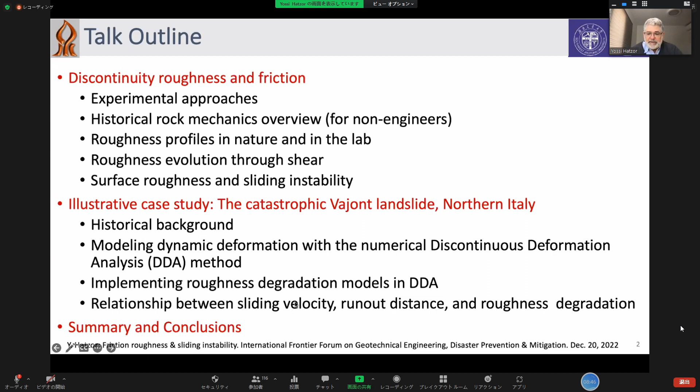So let's begin. For some of you, this will be a review of well-known concepts. I just want to draw a line and make a common denominator between all of us. So to determine friction in the lab, there are several methods we can use.

One is the simple direct shear device. Simple, I mean simple, not simple shear, but direct shear, simple device. And this is,

It has a lot of advantages, because when we use direct shear, we can model correctly the deformation across the roughness. Because if we apply constant normal stress, for example, then while the upper box is shearing, it can also dilate up and down. And that dilation plays a very important role in the shear process. So direct shear, the advantage is that we can model dilation.

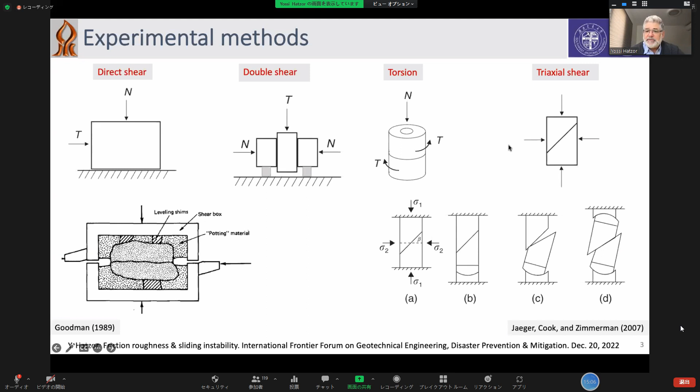So what we're using in this research is our direct shear system. It was manufactured by a company called TerraTek. They no longer exist. They were bought by Schlumberger. And so now it's embedded within Schlumberger.

This is Bob Griffin, the mechanical engineer from TerraTek, who even after they have been purchased by Schlumberger, he still continues to come to Ben Gurion University and provide service. And so these are some graduate students that you will see their results in a minute.

And so we have a normal piston of up to 100 tons force and a shear piston of 30 tons force. And everything is in servo control, both the normal and the shear, both in load and displacement control.

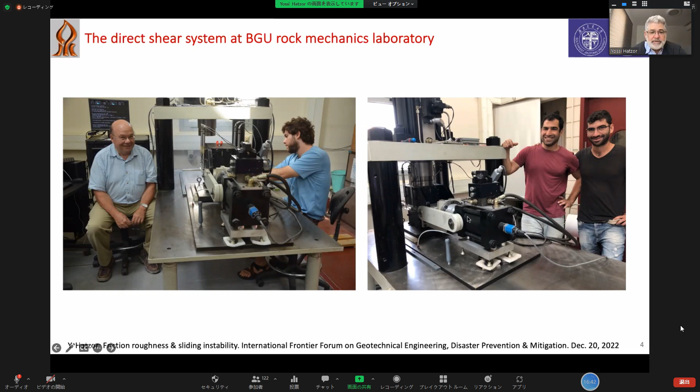So we can impose a normal stress, constant normal stress, and monitor the dilation by the output of these 4 LVDTs very accurately, while pushing from the shear piston. And then we can control the shear piston also by load or displacement. We can shear under a constant displacement rate or under a constant load rate, depending on the application.

So in the triaxial system, we started out with this system also by TerraTek a long time ago, when I came to BGU. I did my PhD at Berkeley with Professor Goodman, and then I came to BGU in the early 90s and received a grant to buy this system. So this is my old triaxial system. And now recently we received another grant and purchased this new triaxial system.

We call it from Vinci Technologies. It's a subsidiary of Vinci Technologies called Flux Lab, in France, in Paris. And the nice thing is that it's completely different technology.

These are working on syringe pumps here. We have 3 pumps for the axial piston, for the radial pressure, and for the pore pressure, and they're very, very accurate. The drawback is that the syringe pumps, because of the small volume, cannot really follow the post-peak deformation very well as in this triaxial system. Even if the system is stiff, as you see, it's very stiff.

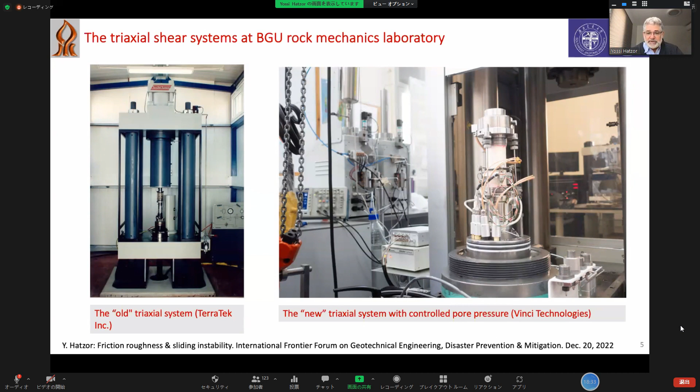It's got wide columns. Still, if you want to monitor or study post-peak deformation, I find this system much more reliable. That works on a hydraulic power supply that applies the piston. Here with these syringe pumps, it's very good for controlling the pore pressure and the confining pressure, very, very accurate. However, to follow the axial stress all the way to post-peak, I find it very challenging in this system. So we are working on this to improve it.

So how do we bring the discontinuity to the lab?

This is a method proposed by Goodman. You can drill across it, or if you intercept the joint in the borehole, that's fine, and you can then cast it and bring it to the lab, or we can just bring the blocks like you see here. This block, this interface here, see. We put it in the shear boxes, the upper and lower shear boxes. So we basically reconstruct the situation in the field.

Now, if you notice this... I just want to see if there's no chat, no questions. Oh, okay. Sorry, let me just make room for the chat on the other screen. Here it is. Okay. All right.

Chat. Okay. Ah, good. Yeah, Professor Hatzor, you will answer the question at the end of your lecture. Okay, they can input the questions anytime, but you don't need to answer them. Okay, thank you. Thank you for the clarification, Professor Chen.

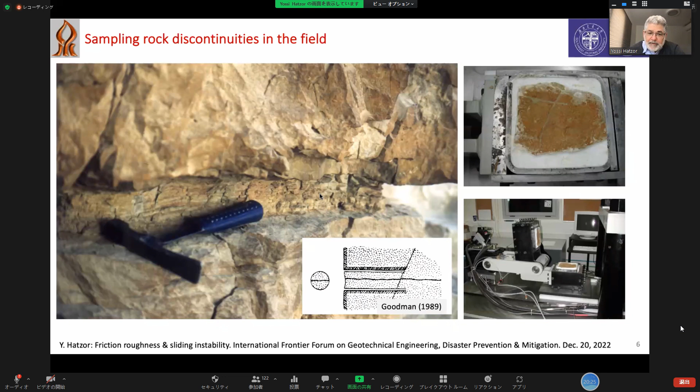So, you see that when you go to the field, the discontinuity is not smooth. It's very rough, and also it has some filling material. And all these things need to be considered when testing the friction.

So just to show you one example, this is the same material that you saw in the slide before. This is in the triaxial shear, and this is in the direct shear. And it's very interesting that the triaxial shear gives us this failure envelope, whereas the direct shear gives us this failure envelope, with peak friction here at 41 degrees and residual friction here at 23 degrees.

This is just for the geologists, when they are not used to friction angle. So what happened? How come the friction coefficient is so high here with respect to this? Well, this is simply because when we shear the rough interface, we mobilize the roughness, and the mobilization of the roughness provides much more shear resistance. Whereas when we shear this saw-cut surface, even if it's filled with crushed dolomites from the previous slide, still we're not mobilizing any roughness apart from the roughness of the saw-cut.

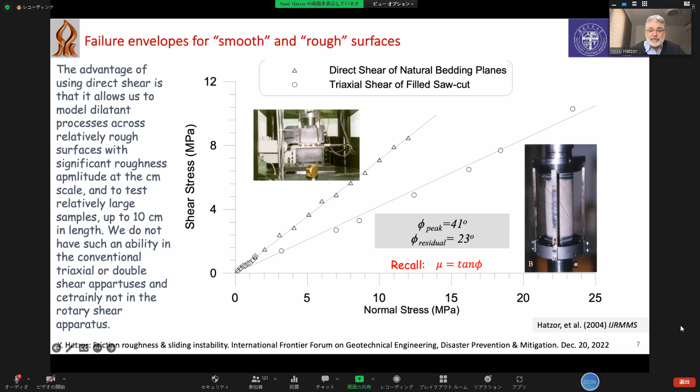And this is why we end up with a much shallower failure envelope and almost half of the friction. So it's very important to realize how important it is to consider roughness. So just a brief review of the literature. Some of you will find that not necessary, but I don't know the audience, who's sitting here. So I just want to give a broad but brief introduction of the principle.

So it's interesting to note that even if you know this material, the direction that I'm taking this is maybe different. Excuse me, I don't have COVID, but a little bit of a cold.

So if you consider this, consider Byerlee's law. All the geophysicists and seismologists talk about Byerlee's law. He compiled results from many labs, also from his own lab. Some of it pre-existing discontinuity, some of it solid cylinder, and plotted and got a line. He went to geophysical stresses up to 20 kilobars, right? This is 20 times 10 to the 3. So these are kilobars, 20 kilobars.

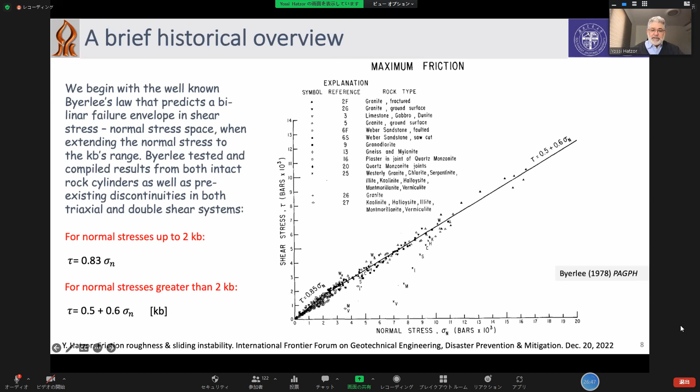That could be the motivation for our work, because people may say dilation is only important for very low normal stresses. But if that is so, why did Byerlee find this bilinear law? So there has to be a contribution from dilation even at lower normal stresses, up to about 2 kilobars. So it's actually quite significant for geological purposes too. This is what I'm proposing.

So how do we measure dilation and roughness? Niek Rengers, in his PhD thesis, came up with a very novel method. First, he used a dial indicator and plotted it on tracing paper, as you do with a profilometer, but he also did it with circular plates to which he attached a Brunton compass.

He showed - these are the poles, for those familiar with stereographic projection - the poles of the small plate, and these are the poles of the large plate. You see that the poles of the small plate cover much more area than the large plate, meaning that the small plate can capture the roughness better than the large plate. So we understand from this that the roughness is scale dependent.

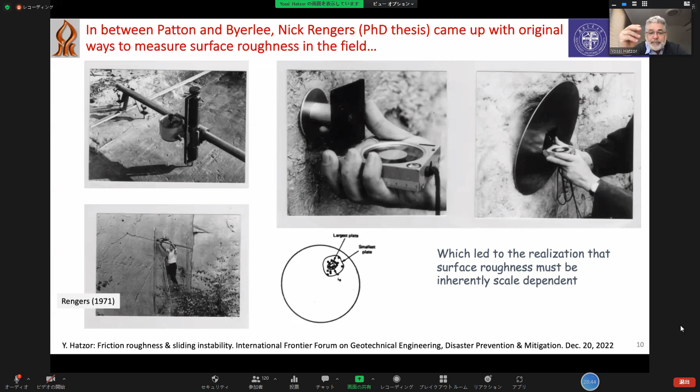It depends on scale, on the scale of the measurement device - if it's a line, the wavelength of the measurement, and if it's a sphere or a plate, the radius of the plate. This is very easy to understand, because the smaller the radius of the plate, the more you can measure the details of the roughness. So the roughness now becomes a scale-dependent parameter, not just i as Patton proposed, but i per scale, for some scale.

Another thing Rengers showed very nicely is that if you have an initial roughness and you shear, the amount of dilation you can expect goes down with the distance of shearing. If we only shear 1L, we get this delta H1. If we shear 2L, we get this dilation delta H2. If for every L we plot all the values - 1L, 2L, 3L - and take the extreme values at each base distance, we get a roughness envelope that goes down, meaning the actual roughness angle is reduced with displacement for a given roughness profile.

Then, as Goodman suggested, you can put it into the shear criterion: phi residual plus i, the relevant dilation for the amount of displacement we're talking about. So for each amount of displacement, there's a different dilation angle. It's very important to realize two things: that dilation is scale dependent, the roughness is scale dependent, and that the dilation changes with displacement.

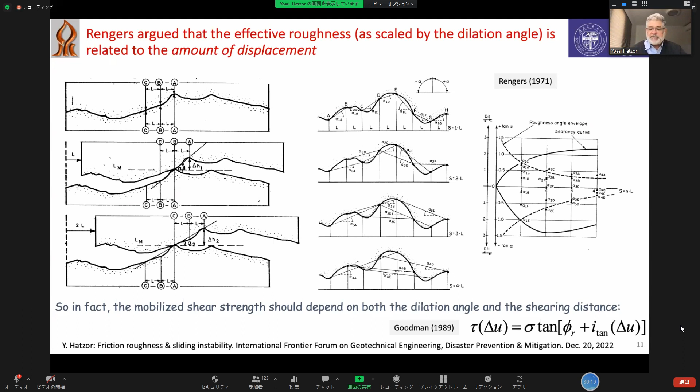Another contribution we will use in the case study was by Bandis, who later collaborated with Barton. In his PhD thesis, he showed that the peak shear resistance changes with block size. If the block is small, 60 millimeters in this model across the same joint roughness, we're mobilizing the maximum amount of shear. With increasing block size, we mobilize less and less shear. This goes back to what Rangers showed us: if the block is small, it rides over all the asperities and mobilizes all the roughness, which is why we get much higher frictional resistance than when the block is large.

Something interesting to point out: the peak friction is mobilized when you shear approximately a distance of 1% of the block length of the overriding block, more or less. So 0.6 millimeters for a block of 60 millimeters, and 3.6 millimeters for a block of 360 millimeters. It's just a rule of thumb. He and Barton never said this explicitly, but it's something that comes out from this set of tests - that when you shear about 1% of the overriding block length, you're mobilizing most of the friction.

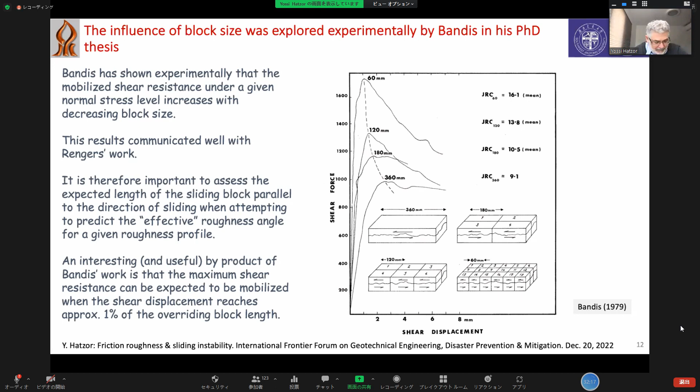Finally, Barton proposed, using the same result, that the shear strength is comprised of the residual friction angle, a geometrical component, and an asperity failure component, and that's what led to Barton's JRC. We understand that there's a basic friction angle for joints, which is the pure friction angle - what it is, we need to determine. The geometrical components and the strength failure component change with size, so the smallest blocks give us the highest geometrical and shear strength components.

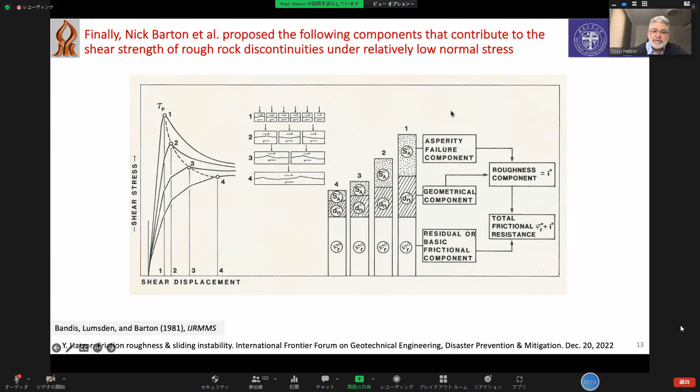Okay, so we know all that, and now we go to the real world. People have been studying this for a long time, starting from the 80s when Mandelbrot proposed his fractal theory. People wanted to see if it works also for faults, and they started plotting the wavelength and the roughness in terms of power spectral density, with units of meter cubed, but you can also think of it in terms of RMS deviation from the mean, and it looks the same. If we plot those on a log-log plot, we get a linear trend, meaning the roughness increases with the wavelength - the larger the wavelength, the higher the roughness.

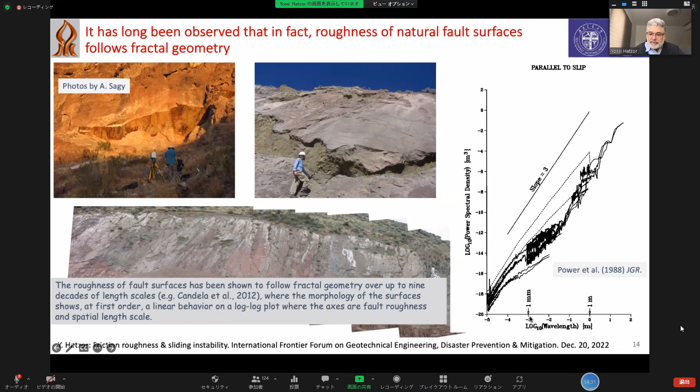So as we already saw in the historical overview, you can't talk about a constant value of roughness. You must consider the scale of the measurement, and it goes like this. This has been shown for nine decades of wavelength - it continues to plot on a straight line.

So how can we create rough faults in the lab? What we do is take a prism - this is a limestone prism. We move aside the direct shear system and use just the normal piston. The direct shear system is here on the side; we move it aside, we have air bearings here, we open up the air pressure and shift it to the side. Then we tell the piston to go down at a constant rate - not constant force, but constant velocity rate.

We create a configuration of four-point beams - one, two, three, four. The compression arch is like this, and here it is tension. So now I take my T, and exactly when I take my T, it breaks - always breaks when I take my T. So we get this fracture, which is basically a tensile fracture that we created in the lab, and the roughness is very significant.

This is a diabase or gabbro taken from a quarry in China - we found it in Israel, but it was originally from China. You can see this roughness was created by this method. Then we can go and saw cut the surface to get the roughness of the saw cut, and then we can go and polish the surface.

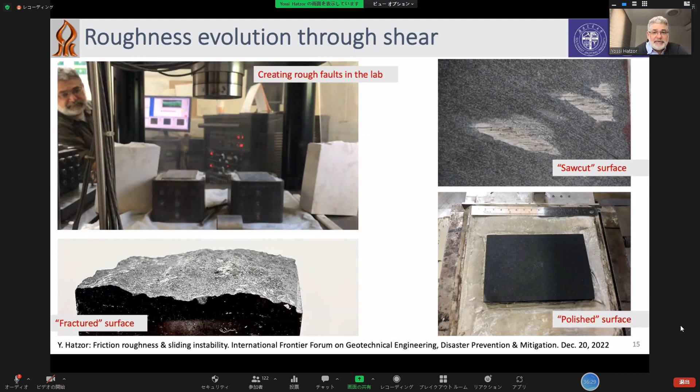So we get the polished roughness, and then we need to scan the roughness. There are different ways we can do it. This machine, this profilometer, we used for most of our tests and measurements. It was good to go all the way down from fractured to saw cut surfaces.

For the polished surfaces, we went to another university, the Hebrew University, to use a white light interferometer, because it can avoid the reflections. It can deal with the reflections that come back from a very, very smooth interface.

And finally, in our lab, we have another young faculty member, Yuval Tal, and he has this scanner that is very, very accurate. Here you see we use it now to study the roughness of inclined joints for induced seismicity studies, how roughness influences induced seismicity, and you see the device and how it works. So we have all these tools to measure the roughness, so we can do that.

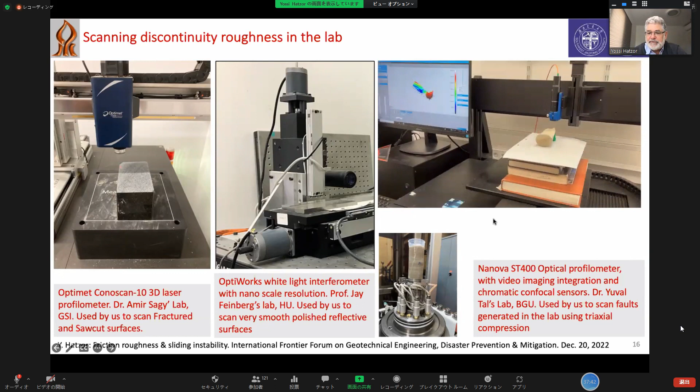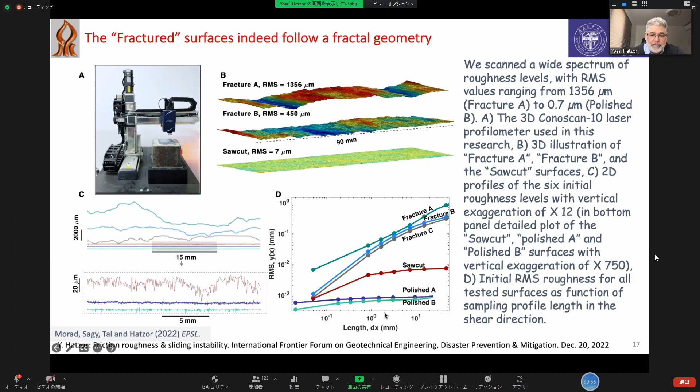So we can go from, these are 0.7 or so microns, to this which is 1,300 microns. So very, very large. Of course, when you say what is the RMS, you have to specify this RMS is for some kind of length. We did it for the 4 centimeter range. So RMS again is a function of the length, and in this case we report it for 4 centimeters. So now, how does the result look like?

Look at how the results look for the friction. This is the same rock, the same diabase from China. You see for the very rough interface, fracture A, we get a friction coefficient of more than 2. And then it breaks and it slides, and here there's some stick slips. This is fracture B and C, and this is the saw cut. They all converge more or less to the same residual friction of 0.6, as we're used to. But when we go to the polished surfaces, the friction coefficient goes much lower, even around 0.1 or 0.2, very, very low.

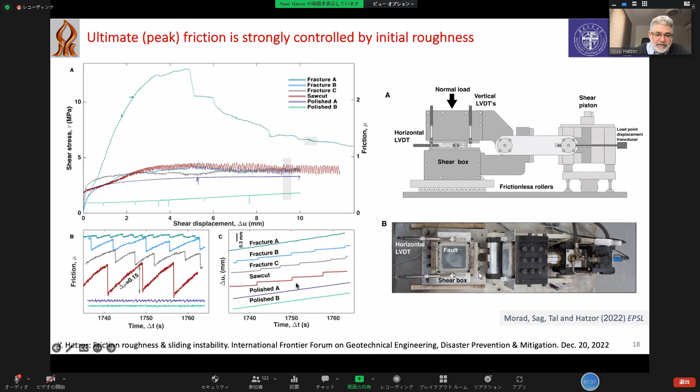One of the interesting things in this research is to show that the stick slip oscillations that indicate unstable sliding are very much a function of roughness. If we take these areas, stick slips from here and from here, you see that the amplitude of the stick slip peaks at the saw cut surfaces, and then it goes down toward both extremes. Somehow the saw cut surface is more prone to stick slip deformation than the other surfaces, and you can see the stick slip here in time space. This is the displacement; you see that the saw cut is much more pronounced, and we'll get back to that later.

So what happens to the roughness with shear? As we would expect from earlier studies, the roughness would degrade with shear. Here we start with 7 millimeter slip and increase to 12, 10, and 15. You see that the roughness spectra are reduced in all cases, and reduced more with increasing displacement. It's interesting that it's reduced on all scales, on all lengths, simply the surface becomes smoother. So this we can show very clearly.

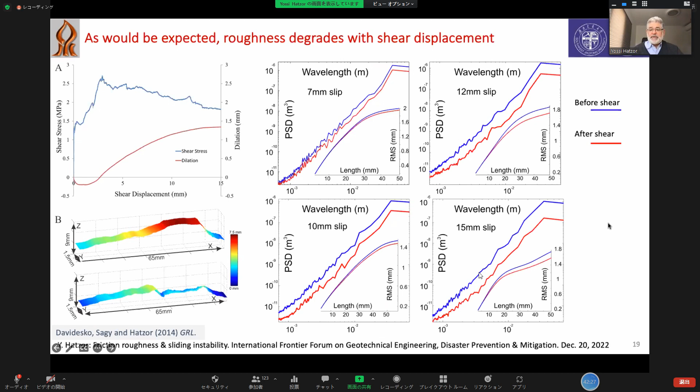About normal stress, it's not so simple. With normal stress, we're getting a trend where below 5 MPa, we're getting the smoothing.

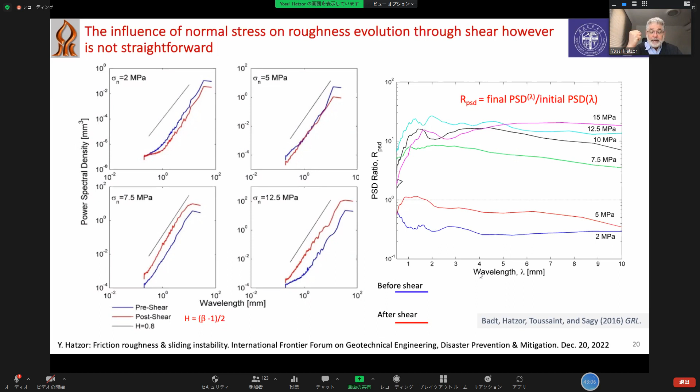So this is the ratio before and after. It's lower than 1, it gets smoother. However, when we go beyond 5 MPa, these are limestone interfaces, and of course this would be different for every kind of surface. So when we go above 5 MPa normal stress, the surface in fact becomes more rough. It's not so easy to explain why this is so, but the observation is good.

For example, look here, this is 5 MPa normal stress, and you see that those asperities are decapitated, they are cut, they're sheared through. Whereas when we go to 12.5 MPa, you see the opposite. We get a rougher surface; this one is smooth.

And here... oops, I'm sorry, how did that happen? No, that's not from me. What's that? Somebody is drawing. Okay, never mind, please don't draw on the screen.

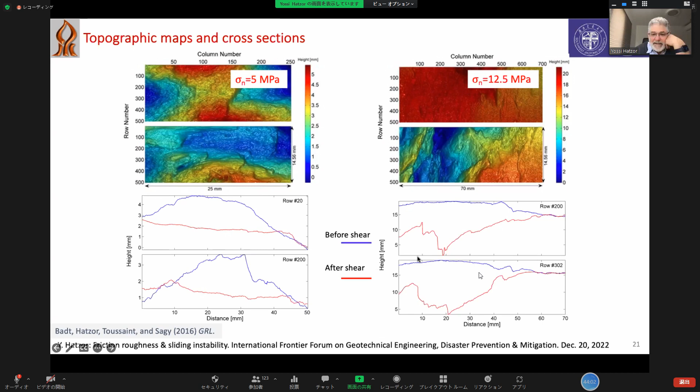So in this case, in the higher normal stress, we get roughening. Why is that happening? I think we have a suggestion, we're just working on it now.

If we consider the shear stiffness of the interface, we find that it increases with normal stress. So it's possible that under higher normal stresses, the asperity material behaves in a more brittle fashion, and so it's being plucked and leaves a rougher trace after the deformation because it's stiffer. This is just a hypothesis, we haven't worked on it enough.

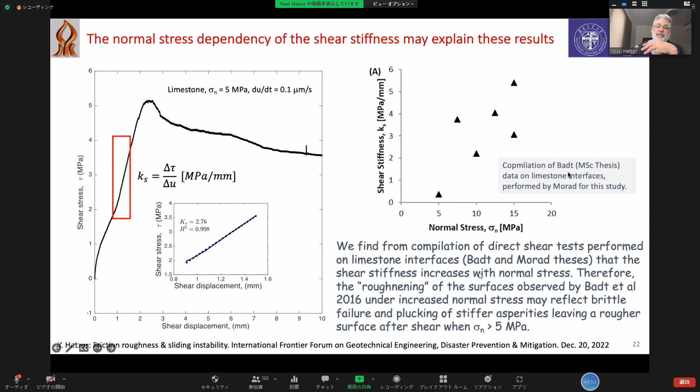Now about the stick slips, let's go back to the stick slips. This is from Jaeger and Cook, now Zimmerman also, so this is very famous. The stick slip is unstable sliding, we have a maximum and minimum. This is assumed to be the static friction and dynamic friction. You can see it for granite, you see it for gabbro, the static and the dynamic.

And this is the model, some of you may be familiar with it, the spring slider model. You push, you absorb elastic energy up to a certain point, then it jumps, and that would be the displacement versus time function. In Jaeger and Cook's book, all the equations are there, all the differential equations, and you can calculate everything.

What we're finding in this research is that the stick slip for a given surface, same material, is very much a function of roughness. And another thing that is important to realize is that the stiffness of the machine is a very important parameter in the stick slip deformation cycle.

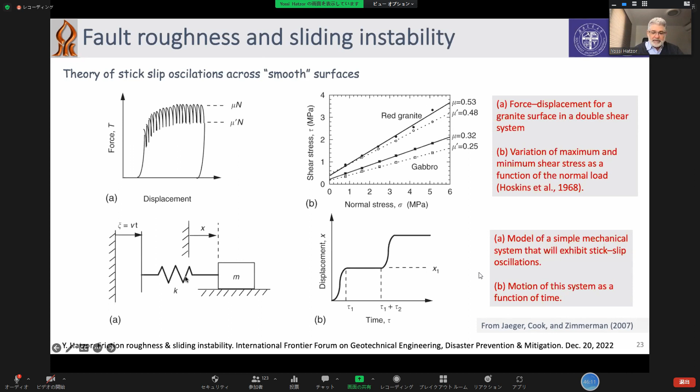So it's very important to be able to measure the stiffness of the machine correctly. If this is a sketch of our system, this is the piston, this is the K machine, and this is the block that is sliding, we can measure the stiffness of the machine in two ways. One, this is the displacement of the piston, and this is the displacement of the...

LVDTs here, so in between is the machine. So the difference between these two displacements would be the curve on which we can find the stiffness of the machine. So that's one way. The other way is just to take those slopes; those slopes are, by definition, if you go back to the theory, the stiffness of the machine. And you can see they all plot on a very, very nice line.

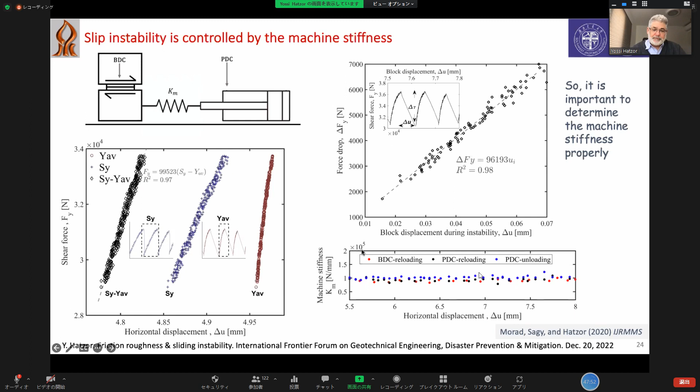So when we combine the two methods of measuring the stiffness, either by subtracting the piston displacement from the block displacement, or from taking the instantaneous stress drops here, those slopes, in both cases we get what we call reloading and unloading. We get more or less the same value, and this represents the stiffness of the machine. So we know what the stiffness of the machine is, this is Km. We know exactly what it is, say 10 to the 5th newtons per millimeter.

Now, another thing that is important to see is that the amplitude of the stick slips is also a function of the control mode. If we are controlling from here, we prescribe constant piston displacement rate, then we're getting these curves, the gray shade for two roughnesses, the 7 micrometer and the 500 micrometer. Again, the 7 micrometer is more noisy than the 500 micrometer.

However, if we control from the block, telling the block to go at a constant rate from the output of those LVDTs, then we get this noisy, jerky motion. And that's because each time the system releases the energy and the block flies forward, because the command is on the LVDTs, it's being retracted to correct for the spontaneous jump forward.

And this is why we're getting those oscillations that are much, much higher. And you can see that in both cases, we used exactly the same surfaces, so there's not a surface effect.

This means that the control mode is very important. In fact, in order for all the theory in Jaeger and Cook to work, the command, the control, is to be on the piston, not on the block. So all the equations for the spring slider and all the theory is developed when this is proceeding at a constant velocity, so we call it the PDC symbol.

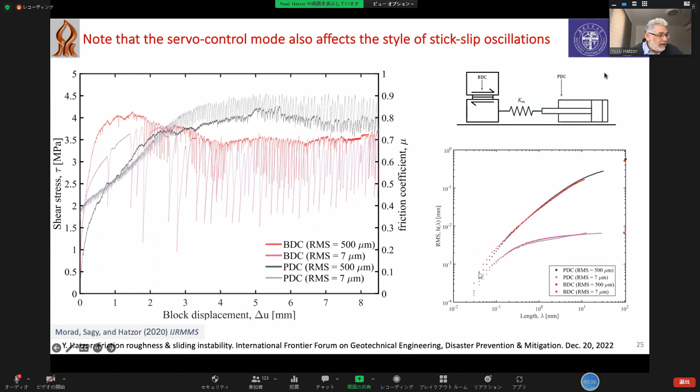So what we see is that the stick slip deformation is very much a dilatant process, and that's important if we want to study, for example, induced seismicity and things like that, since the interface is dilating through shear. Then, of course, the pore pressure regime is also changing through shear, and this has to be taken into consideration.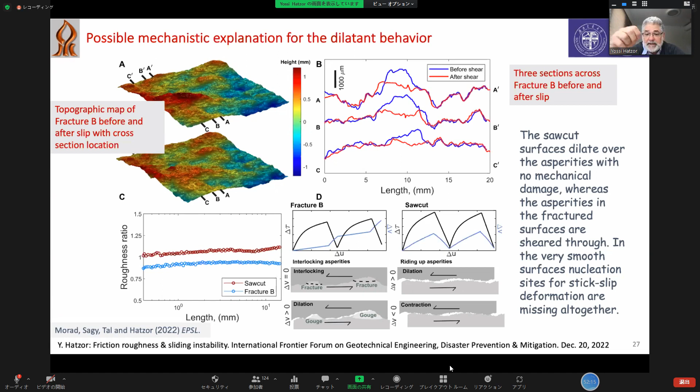These curves here are real experimental results. We see the sawcut - or maybe this is just a cartoon showing the experimental results I showed you, I don't remember if it's one-to-one or just a concept - but we saw it before, and so in the sawcut there is dilation. Without shear, we see that the stick slip oscillations, which are the analog for earthquakes and unstable sliding, are very much a dilated process, and very much sensitive to this roughness of the interface.

So of course it does - the roughness doesn't influence the stiffness of the machine.

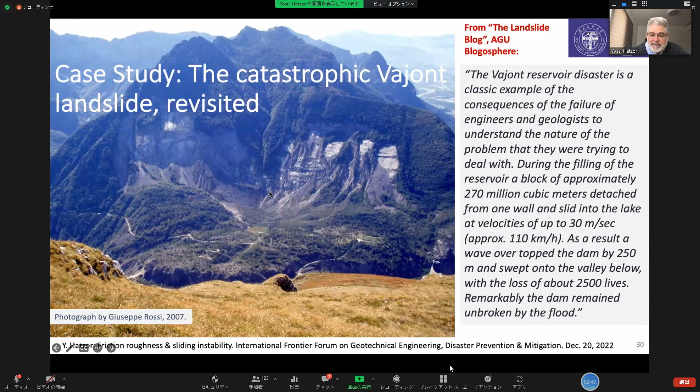Here in northern Italy, this was already a slide, an old slide. It slid in the past and stopped here, and we see parts of this material juxtaposed on this slope. So we know there was a landslide in the past, then erosion through the landslide, and then the valley, and now the slide started again.

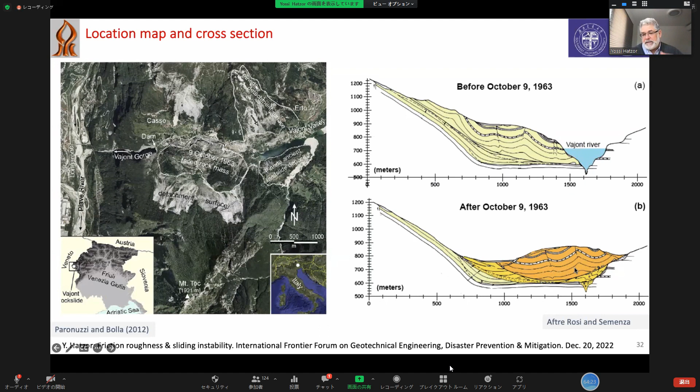The electrical company of Italy wanted to create power, I don't remember if it was 100 or 200 megawatt turbine in this dam. So in order to make power, they needed the reservoir level to be high. But when they increased the level of the reservoir, they got movement. So they dewatered, took water out, and the movement stopped. If the movement stopped, they raised the level again, but then the movement started again.

See? The movement starts again. If the movement starts again, they draw the water. They draw the water, and the movement stops.

Throughout this process, Semenza is telling them what they're doing is dangerous because the mountain is moving and responding to the changes in water pressure. And Professor Leopold Muller, after whom we named the Leopold Muller Award in rock mechanics, ISRM, was a very famous rock engineer, maybe one of the leaders in the world. I think he started the rock mechanics and rock engineering journal. So he's a consultant, and he says no, it's okay, you can go ahead, as long as we drain it, they drill the drainage tunnel. He says go ahead, it's fine.

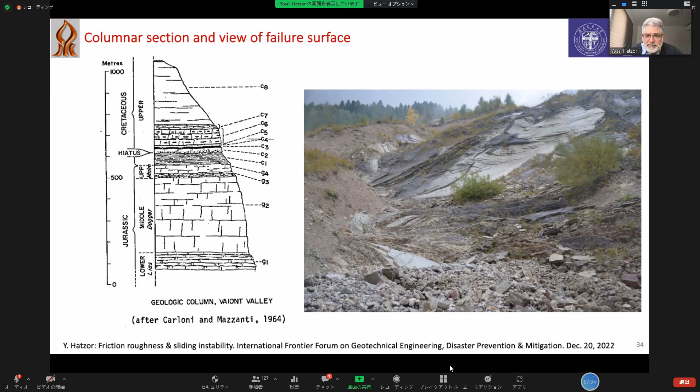This is where the slide took place, on this hiatus here. It's a limestone with some clay on top. I was there, they invited me to give a keynote lecture when they celebrated the 50-year commemoration for the Vajont. It was in 2013. I gave them a talk about DDA, I didn't do all this back then, I showed them other things. They were interested in DDA, so they took us to see this.

They appointed an investigating committee with Hendron and Patton, two very famous rock engineers from the US. Hendron and Patton came up with these conclusions, that the clay layer friction is somehow between 5 and 16 degrees, and it's in a residual state. The residual state is 12 degrees. And the rock mass friction angle assumed for the rock joints is not degraded at all. So these are the initial conditions that Hendron and Patton took for their analysis.

Then they did their analysis, a very elaborate analytical analysis. In the report, you can track that.

And this is the result, shown in a space of velocity and distance. Depending if you degrade the clay by 50 or 60%, you move from this circle to this circle. This map is the velocity-distance map. And that explains the failure, because we know how far it slid, we just don't know how fast. But there are other hydrodynamic models that give constraints on the velocity needed to raise a wave of 250 meters. So this is the result of Hendron and Patton.

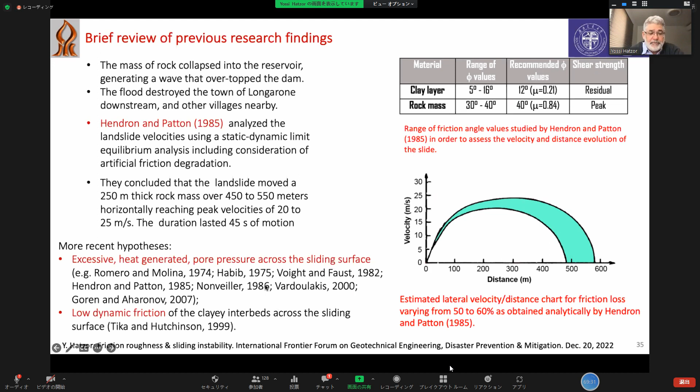They did this analytical procedure, which I will not review here, but it's basically an analytical approach. And of course, over the years, many authors tried to deal with this and solve it in different ways. Here's what we did, very simple: we said the rock mass is 40 degrees.

And the clay layer initially is 22 degrees. We say 22 because we know that under these conditions, it's marginally stable. The degraded parameter is 12, as in Patton and Hendron. And then through slip, we're only going to degrade

25% in the rock mass from 40 to 30, and from 12 to 9 in the clay layer. The degradation will be a simple model, building on the result I showed you by Bandis, that when you displace 1% of block length, you mobilize maximum shear. So for every block, once it moved 1% of its length, the friction at the contact is reduced from 12 to 9 in the clay layer.

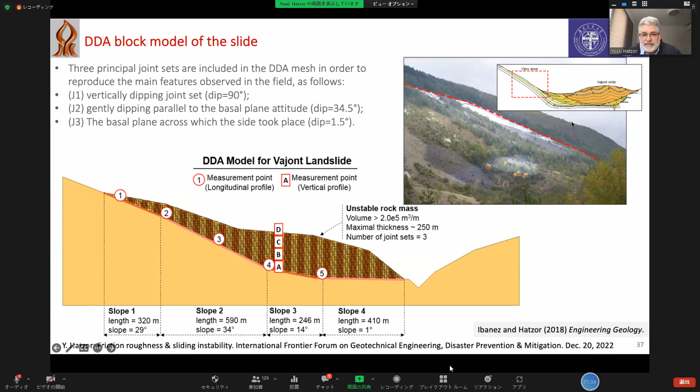So this is before the slide, and this is after the slide. So this is before the slide. Here's what it looks like.

The slide begins to slide and the velocities begin to evolve. So the red colors represent velocities higher than 15 meters per second. You see these points here are very fast. Now everything is fast. And now these blocks here begin to slow down because they have to climb on the slope. So they slow down. This is still very fast.

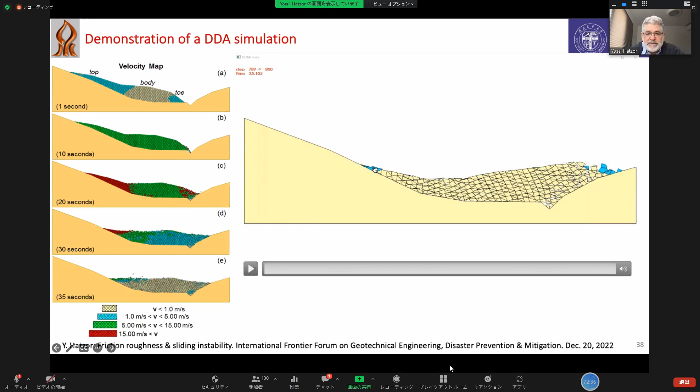And this continues to push up. And remember, we have constraints from the field, so we can always know if it's following the physical reality in the field. And now you see it stops. The velocity is gradually stopping, and that's where I stopped the movie. In a few minutes, this will all stop.

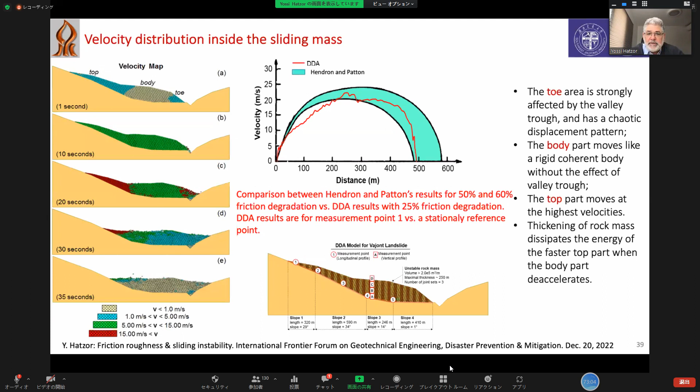If these are the results of Patton and Hendron for 50 and 60% degradation, these are the DDA results for the simple bilinear law with 25% degradation. So we don't need to degrade the friction to such low values, only 25%, to reach those same results.

And just an interesting point to point out, if you look at the velocity maps on this cross section 1, 2, 3, 4, 5, or A, B, C, D, you see that point 1 is going furthest away. It's traveling the longest distance, and it reaches the highest velocity. The other points are less. Whereas in the center of the mass, everything slides coherently together.

So this is the distribution of the velocities within the slide if you're looking longitudinal or transverse.

Now, my friend Giulio Di Toro contacted me after the paper was published and asked why we didn't use his results. And it's true, he's right. He had torsion, double shear, and triaxial results for the clay that we're studying. I'm ashamed and embarrassed to admit that I was not aware of their study. It was published in JGR, and we were not aware.

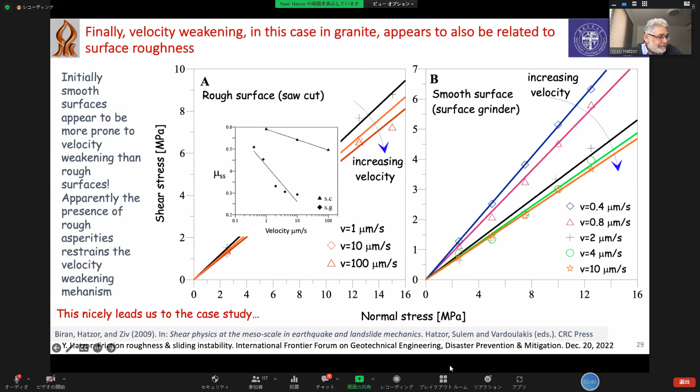This test. All of those tests are done at the same velocity. It's not a velocity weakening test. And then you see how the friction coefficient is affected by the velocity. That's what Di Toro did in his tests. He did this. So it's not letting the slide accelerate, it's just checking the reduction in friction when imposing different velocities.

So we were able to implement this law into the DDA. We just reduced the friction along this exponential curve with displacement to a minimum after displacement of 20 or 25 meters. That's from his lab tests, see? And then we let that run in DDA. So the velocity evolution of the slide is a result of this friction degradation.

Okay, thank you very much. Anyways, I say your simulation has good result with the real fact. Okay, thank you very much. Yeah, thank you, Professor Wang. Professor Wang Gonghui is a professor of Kyoto University, Japan. He is also an expert on experiments.

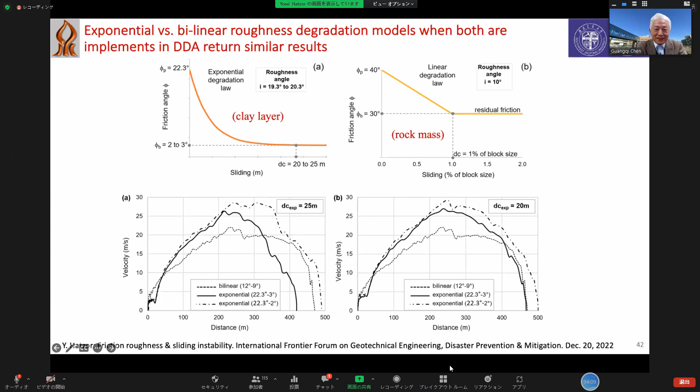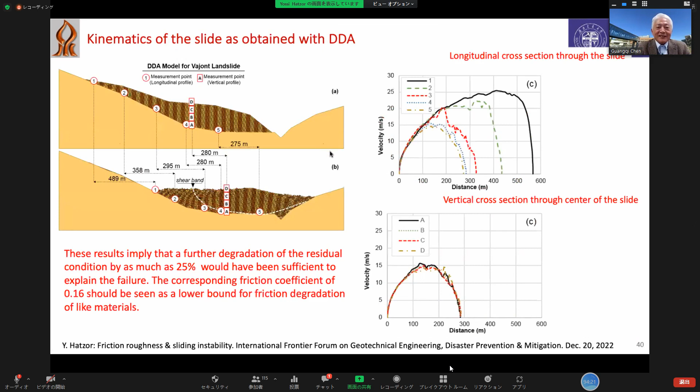Up to now, we have, there's not very much of this kind of data. Yeah, I agree, I think this is where we should go in this direction. My slide keeps changing, we need to study this more. I think we need to study more the two end members. One is changing the friction value with displacement because of processes like degradation, and the other is just changing the friction because of the velocity. These are two different approaches.

I'm saying that velocity in the real world, in the lab, you control the velocity. But in the real world, I'm saying that the velocity is a result of the friction degradation. So in the physical world, it's a different process than in the lab. The velocity evolves through sliding. So you have to give it a reason.

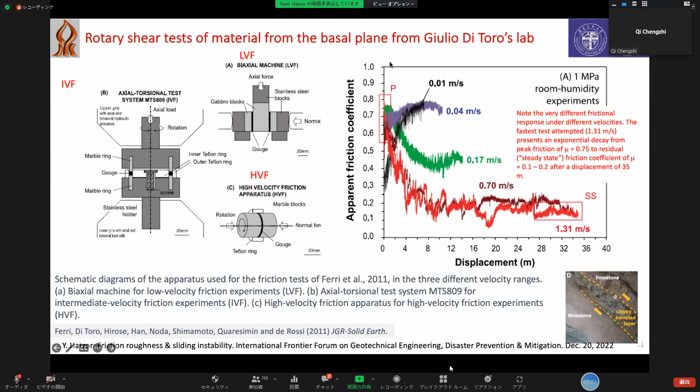My question is, you found a critical roughness for instability. Is this condition necessary or sufficient condition for instability? Thank you. Good, so traditionally people talk about two criteria for instability. Number one is velocity weakening, and number two is stiffness, Kc greater than K machine. Is this clear? Yeah, you're familiar with that.

So we go back, let me go back.

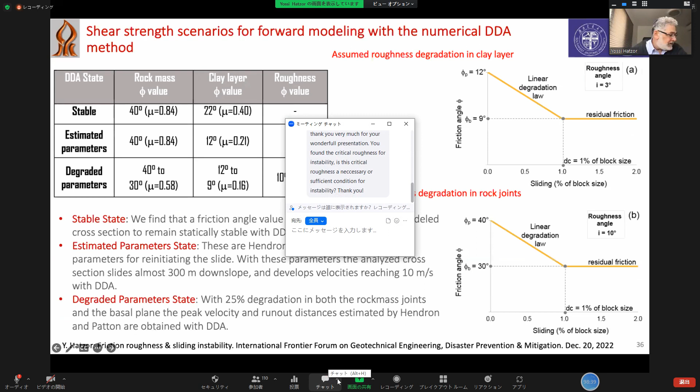So two criteria for instability, traditionally, one is velocity weakening, and the other is this condition that Kc is...

Critical roughness is basically a new concept now, and I think your question is excellent. I don't want to say that everything done before is wrong, but certainly this criterion proposed by Dieterich, Ruina, and Jim Rice must exist for instability. What I'm showing in my work is that this instability, the difference between Kc and K, is a function of roughness. And I don't need the criterion for velocity weakening. I don't know if this answers your question.

Okay, so it's a new idea. Nobody talked about this before. Let me tell you, I think this is maybe my most important work until now. I don't know if it will be realized in the profession or not. This is why I sent it to this journal, because I want the seismologists and geophysicists to realize this.

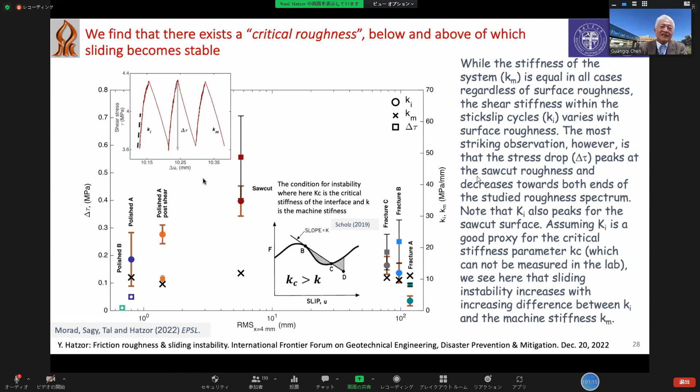Thank you. Is this okay? Thank you very much for your discussion. I hope the time, 10 minutes past, was okay and my answers were sufficient. If not, people are welcome to contact me by email and I can discuss more.

Maybe we have a chance, and next year you should come to China for ICADD16. It also depends on the coronavirus. Maybe I will invite you to China next year, and maybe I will come back to China. Oh, that would be wonderful. And invite you to do an experiment together. That would be wonderful, okay?

Do you remember we worked in Wuhan and talked about things? Yeah, we already met. I remind you, in Professor Shi Genhua's house in 1992. Yeah, that's right, we met sitting on the floor. Yeah, I never forget. And then in Wuhan, so sure.

Yao Yoyong, you didn't have any question? No, very good, your presentation is great, moving away from DDA to the lab. Maybe I'm more comfortable in the lab.